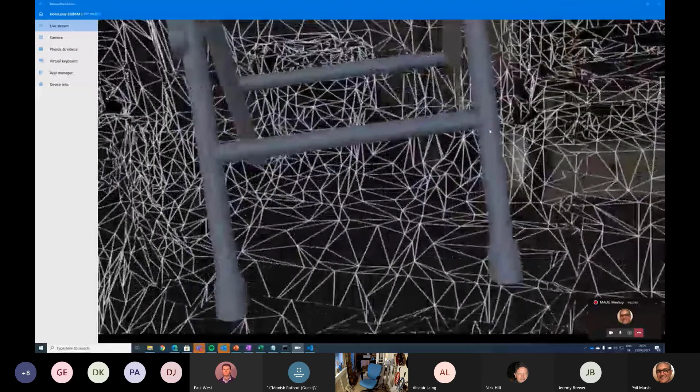So imagine the scenario here where we've built a solution. We've got our IoT sensors on machines in a quite complex plant, we've got that telemetry coming up, and we've built the environment through the models. Now, I'm going to get narration here, but I don't think you're going to see this. This is a great example: imagine now I'm a worker in a plant. I need to be heads up, hands free, because I've probably got tools. I'm just going to put the model.

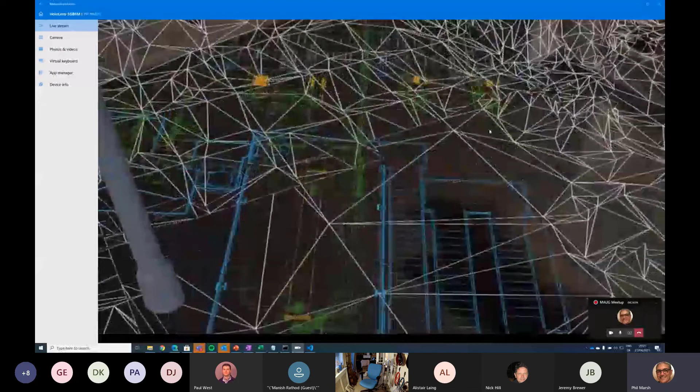We're losing you again a bit, Rich. I think okay. Is that better now? It is, yeah. Okay, I'll try and stay in here a bit if I can.

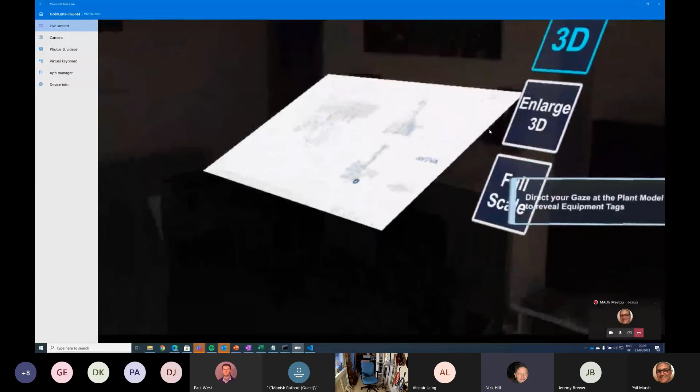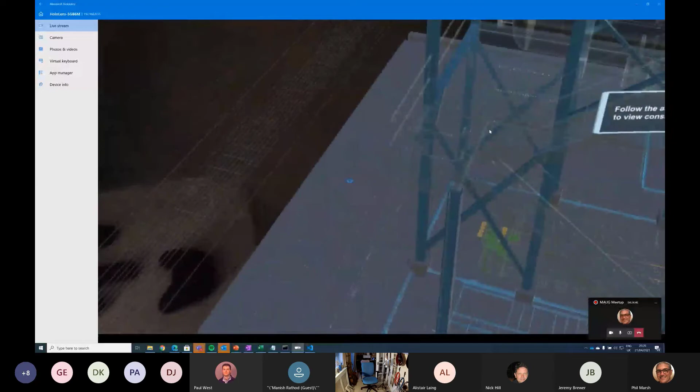Let me just see. Okay, so let's go into 3D here. And now you can see the plant itself. I'll try and stay closer to the edge of the door. I'll skip this bit. So that's going to blow up. And you can now see as I'm looking around, there's the plant. Now, I'm going to go to full scale. And then you can see.

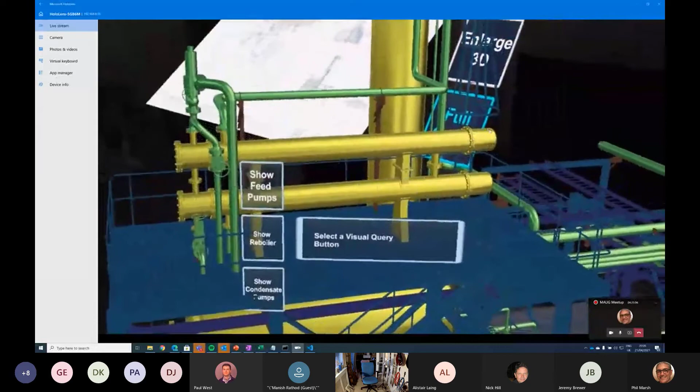Now, as I'm looking at these pieces of equipment, this model ID in 3D maps to something in the digital twin. As I start to get information from these pieces of equipment, I can start to look at them, and just imagine that I've got that signal or that near real time information popping up that's going to give me the information that I need. Now I'm going to pull in

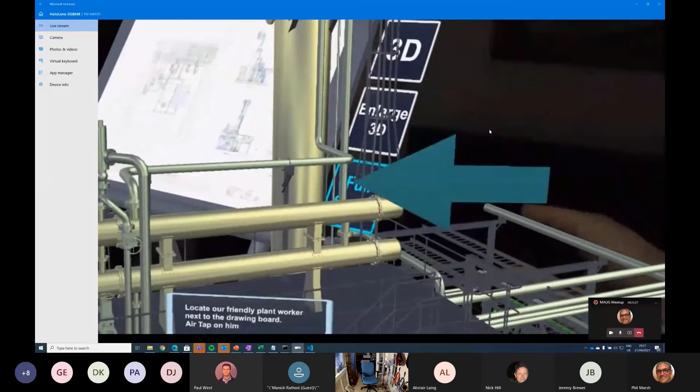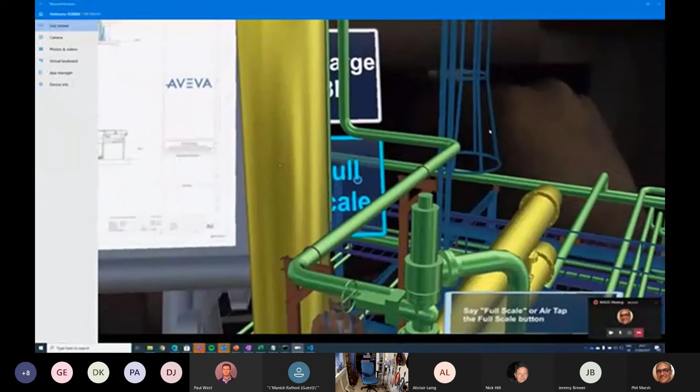We can't hear you, Rich. I don't know if you're talking or not. Yeah, I'm starting to look here now. You're breaking up a bit again. Oh, okay, no worries. That's a shame. I thought my Bluetooth would work a bit better. Let me just stand back there. So now I'm going to click on the full scale piece. Bear with me. Hopefully that's working now. Can you still hear me okay? Yeah, you're slightly roboty, but you're okay. Nothing new about that, Nick.

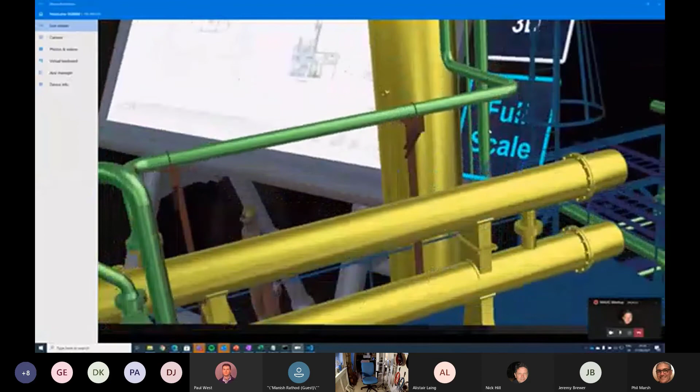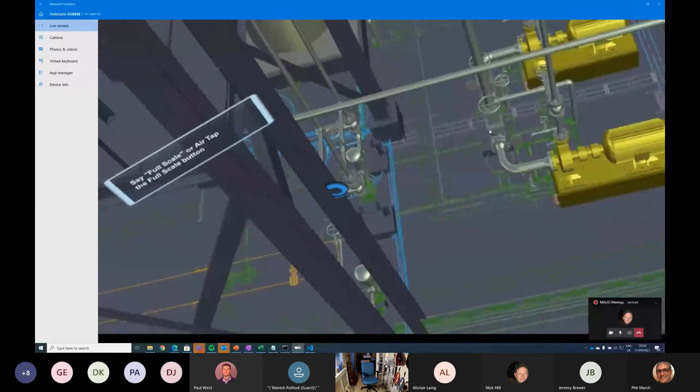Right, okay. I'm going to try this one more time because that's blocked out a little bit there. Yeah, that's blowing up. Again, I'm a person walking around here. You can see how fantastic this is for zooming in on any piece of equipment. I can get all the latest sensor information coming up, it might tell me service records, service information, etc. Everything that's been stored in the twin.

And I've seen examples recently with the work with the Marsden Group, where this is exactly what they're doing. They're building these 3D models, and let me just turn that off now.

So they're building those 3D models, and that information is all coming in from the digital twin. So what I'll do, there's just another couple of slides that I wanted to show you. I think we're doing probably just okay for time. I mentioned the ontologies before.

So the RealEstateCore is sort of becoming an industry standard. It's very, very popular, and partners are asking for this. If they're doing smart building projects, they will start with RealEstateCore that defines spaces, rooms, etc. And then there's this new one for smart cities as well, which is for these really bigger projects.

And again, I make the point that it's really the use of these industry standard ontologies and the DTDL that's enabling companies and partners to work together rather than work in silos, which any of you who have ever worked in smart building will know that everyone wants to keep the data to themselves. They don't want to share it. They want to sell the insights, which of course is understandable because that's how you get yourself up the value chain. But it has been holding back progress, really.

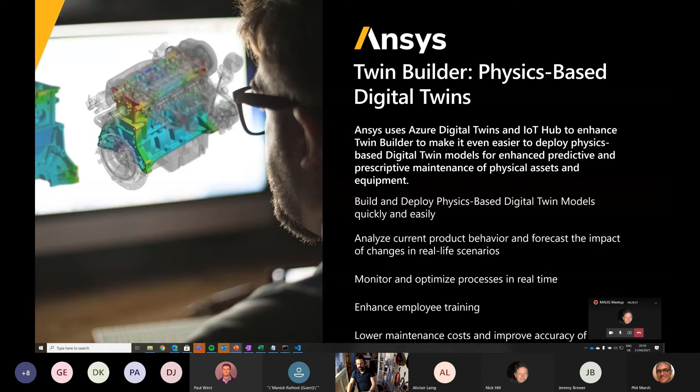ANSYS, great partner who do a lot of work with complex physics, computational physics, and simulations. They now built a solution on digital twin as well to do what-if simulation scenarios. Really interesting stuff. And I'm going to stop there just to see if there's any questions, because I know it's getting quite late now. I'll stop talking there.

Great, thanks, Rich. Any questions, everyone? Rich, Alistair's got one. Go ahead, Alistair. I have to ask. This is kind of way out of the sort of stuff I'm doing, but in terms of an introduction or something to learn a little bit more about it?

Yeah, absolutely. Learning path. So Microsoft Learn on the internet. Let me just see if I can find it for you quickly. It's actually Learn IoT. There's a new learning path actually. So if you can see this, and if I search in there, digital twin, there you go, develop with digital twins. Brilliant. So let me just quickly paste that into the chat. There you go. So you'll find a few links out from there.

There's another GitHub one as well that I might actually have up here. If I can't find it now, I will send it to you, Alistair. But that's quite a good one. So that model that I showed you with all the factory stuff in, all that is available as well. So you can build the whole end to end, including Time Series Insights. The whole lot. It's a great way to get into it.